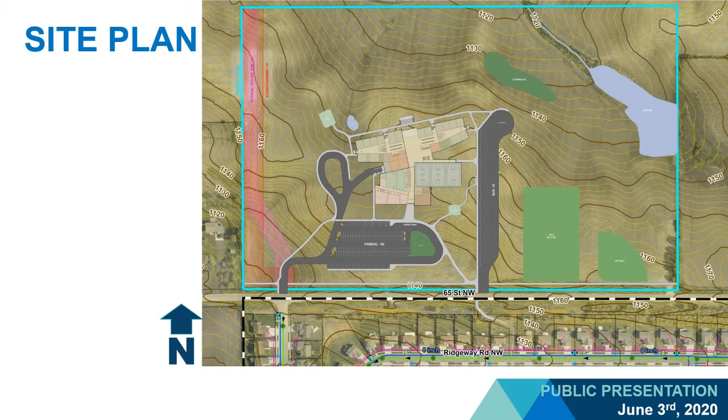The building itself is a 3-story building. Each yellow line in this image is a 2-foot contour line, meaning the grade rises or lowers 2 feet at each line depending on direction. I'll explain why that's important when we get into the building design.

These 4 images were designed by 3 different architects on our team and presented to the design committee to get feedback on the pros and cons of each, and which one they'd like us to move forward with, or whether we should start from scratch.

The option selected is the image in the upper left-hand corner, predominantly because of the 200 student wings. It was the only option showing pods or neighborhoods in the form of 200 students.

So the education wing has a 3-story, 2-wing design, giving 6 wings total for the 1,200 students.

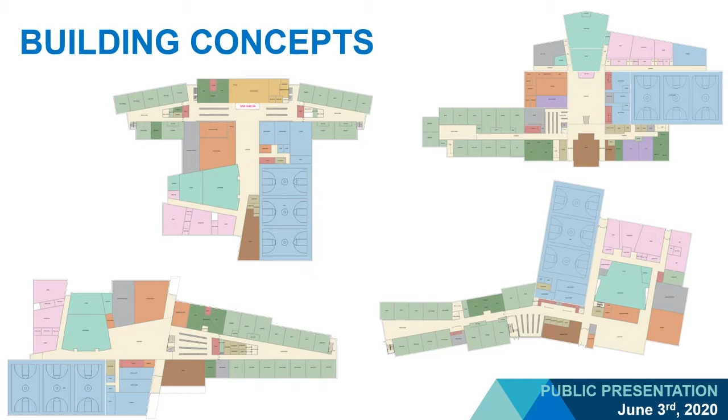Again, the upper left-hand image is the one that was presented. The lower right-hand image is where it has evolved based on feedback from different user groups, as well as additional feedback based on site and other driving factors.

The main entry to the building—I'll differentiate which floor we're on. This is what we call the main floor, which is the at-grade entry from the parent drop-off, parent parking lot, and visitor parking lot.

The brown area in the lower right-hand corner is the main office and secure entry for the building, so anyone visiting must enter through that area. Based on modern security approaches, all doors on the building's perimeter are locked except for this vestibule.

The interior doors at this vestibule are also locked, so anyone entering the building must go into the main office to check in and register before being allowed into the rest of the building.

Other items to note on this floor plan: the pink spaces to the left, or west, of the brown space are the music rooms. The aqua space directly north of those is the auditorium.

The auditorium is designed for 500 seats, which is the equivalent of an entire class of 400 students plus any staff and paras involved with that class.

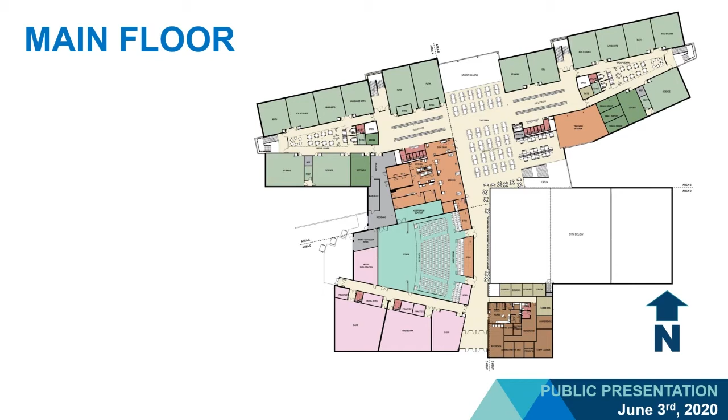From the main floor, we can go up or down. I'm going to start by going down. At the lower level, you will see the blue gymnasium space, at what we call the lower level. All of these classrooms will still have natural daylight.

The main bus entry is that cream space just north of the gymnasiums. So if you're a student riding the bus, you get dropped off near those doors and walk in, at which point you can walk straight ahead to your lockers, or walk up the stairs to the upper level.

Or the cafeteria common space. If your lockers are on the 3rd floor, you can either walk through on this level to the main stair towers and go up, or go up one floor, walk through the cafeteria commons area, and then go up to get to the 3rd floor.

Again, the educational spaces here are very similar. On each end, in the other spaces of blue, you will see 2 locker rooms, 2 gender neutral type changing single-use rooms, as well as a fitness area.

The mustard colored or gold colored area in the middle is the media center. What you see there is a variety of space types for small group and large group use.

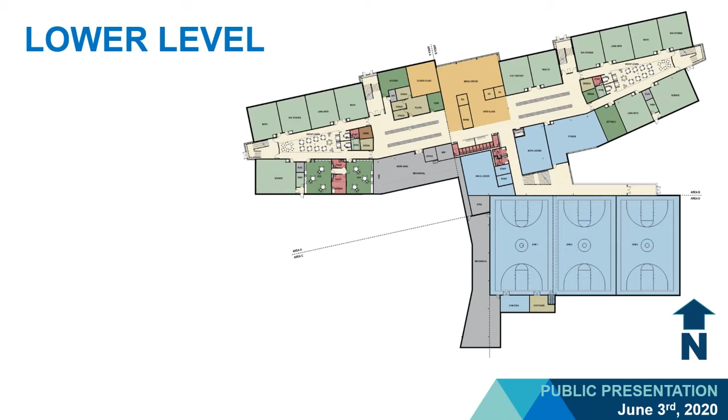The upper level - if you came in on the main floor or parent entry, you would go up one story and be at the top floor of the building. At this story, you see the green spaces in the wings, which are the general classrooms and science classrooms.

You'll also see the dark green, which are the special ed spaces, which have been fully integrated into each one of the wings.

You'll also see on this level pink, which designates the art classrooms, as well as the kiln and storage area for art. Other spaces you'll see are gray, which are the mechanical rooms, providing ventilation throughout the building.

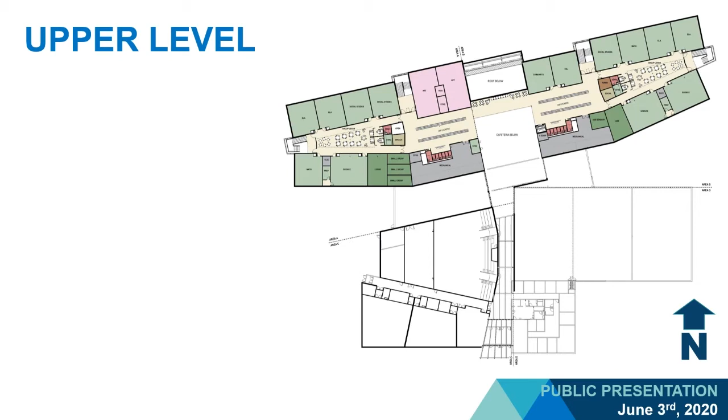Here's where I will address questions. I will go through the questions, and if there are floor plan questions, I will jump back to the floor plans after we've addressed the questions.

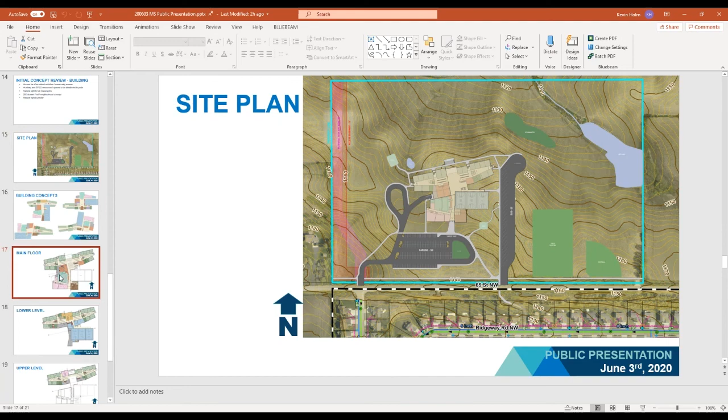I'm going to jump to the floor plan here real quick. The question was about the auditorium seating, and I'm going to zoom in here so we can look at it a little bit closer.

So when I mentioned the entry to the auditorium, this would be the main public entry. You come in at grade, no slope, no stairs, which brings you to this elevation. Handicap accessibility to the stage occurs along both edges, so you could do the actual walk across the stage.

If we reset ourselves to here, this line indicates the start of the slope down to this point, a 30-inch drop. So if you are sitting in this front row, you have a raised stage and good sight lines back to this point. From this elevation, you can turn and go up the stairs back here.

This seating is at a much steeper slope. We'll maximize that slope to maximize space usage underneath for storage. The entire auditorium from front to back seats 500 individuals plus, and that is for a full class plus staff.

I think that answers the questions that we already had. I will go back to the questions now and see if there are additional ones added.

Is there space on the property for additional buildings and or an outdoor stadium? The site itself is a 40-acre site plus or minus, actually closer to minus now that we've had right-of-way requirements from the city on both the south and the west. A middle school by Minnesota Department of Education recommendations is a 37-acre plus site, and 37 would be the minimum recommended. This is intended to be only a middle school site. There is no current plan to put an outdoor stadium here. Those fields are as much for Phys Ed and community use as anything.